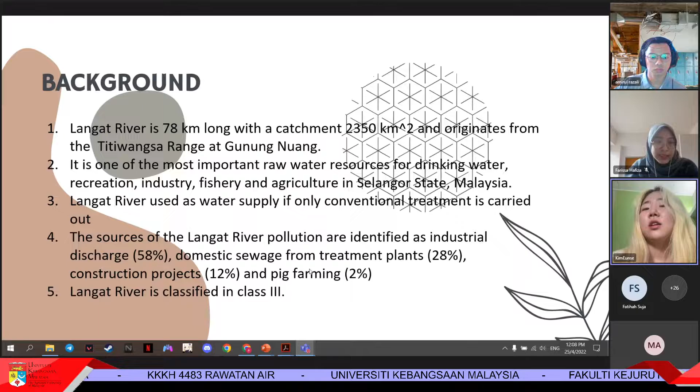It is one of the most important water resources for drinking water, recreation, industry, fishery, and agriculture in Selangor State, Malaysia. Langat River is used as water supply only if conventional treatment is carried out. The sources of Langat River pollution are identified as industrial discharge, domestic sewage from treatment plants, construction projects, and pig farming. Langat River is classified in Class 3.

And the water treatment plant, Kajang Utama, is located in Taman Kajang Utama, 43,000 Kajang, Selangor. The plant serves a wide range of customers, including residential premises, commercial, industrial, and government premises.

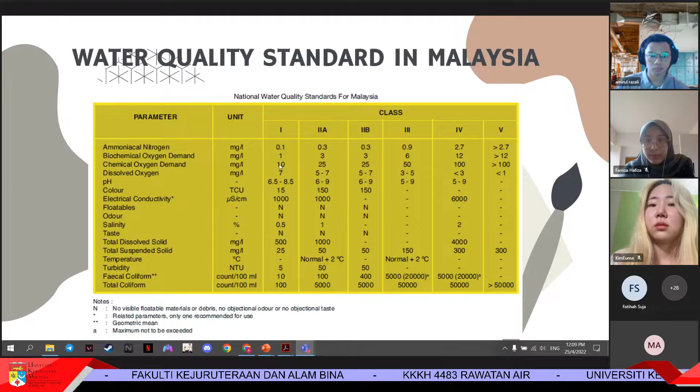As for class 1, it is for conservation of the natural environment. Class 2 needs conventional treatment. Class 3 is for water supply, requiring extensive treatment. As my friend presented before, the Langat River, which is the river we chose, is in category class 3.

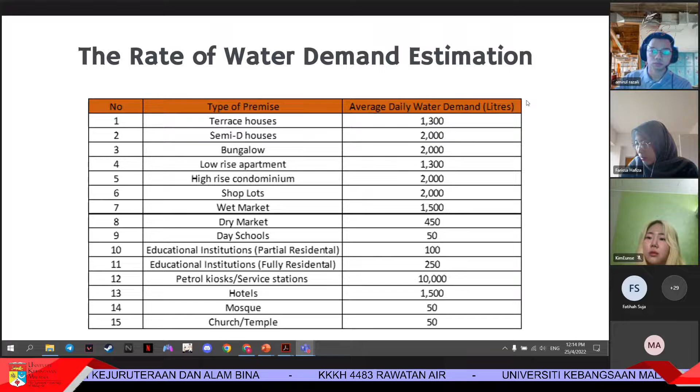The next step is to estimate the rate of water demand. The Uniform Technical Guideline of Water Reticulation and Plumbing is used to obtain the value of the average daily water demand. As listed in the table, there are 15 different types of premises with different values of average daily water demand. The water demand and consumption may vary considerably within each of these housing groups based on property characteristics. For example, a terrace house has a value of 1,300 liters of average daily water demand, while semi-D houses have a value of 2,000 liters.

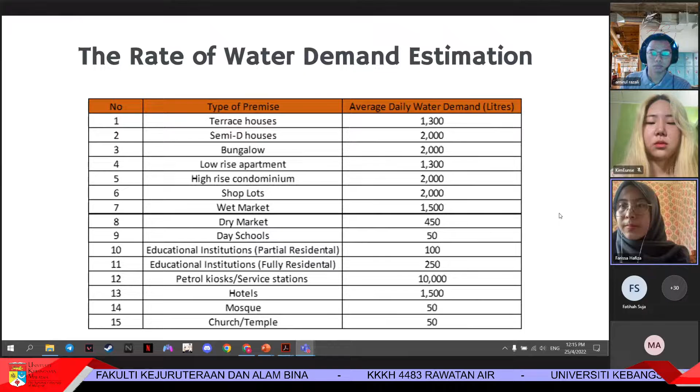The next slide is about the calculation of the water demand. For example, the terrace house density of 1,500 units is multiplied by the average daily water demand of 1,300 liters per unit, and then divided by 1,440 minutes and 1,000 liters, to obtain the estimated water demand in minutes. As a result, the estimated water demand for terrace house is 1.35 cubic meters per minute.

The water demand for other buildings is then calculated using the same steps as shown in the table. The total water demand in this area is calculated by adding the total water demand for all 15 buildings and premises. As a conclusion, the Kajang 2 catchment area estimated water demand is 8,521.75 cubic meters per day, which is equivalent to 5.92 cubic meters per minute.

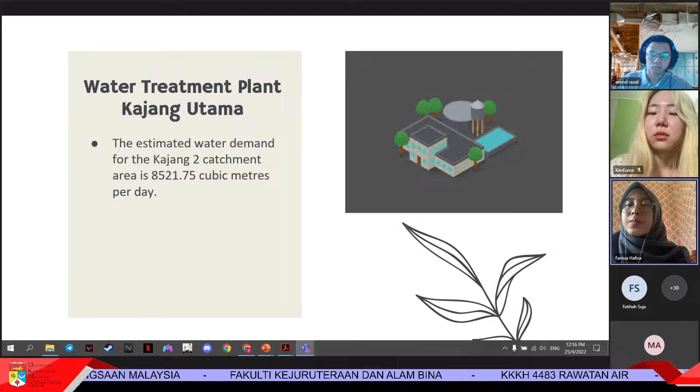Good, okay, we have listened to the presentation about Langat River. Okay, can I have a look at your comparison with the Korean guideline just now? This one. No, the one with... very good, this one, status character.

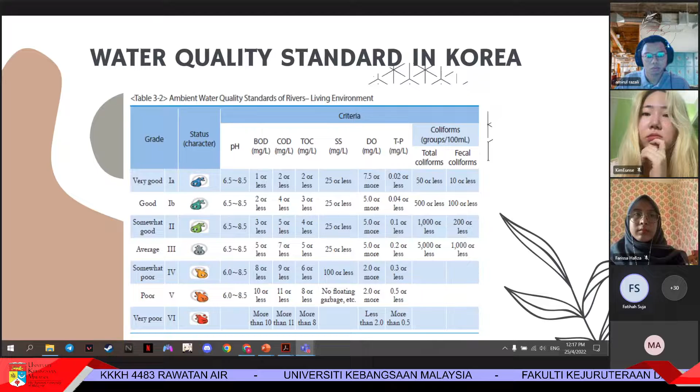Okay, in Korea, do you specify the water quality that is used, that will be used, for drinking water source? Do you specify which quality that need to be? So which quality do you allow the resource water to be used for your national drinking water treatment plant?

Actually, I have prepared that for the drinking water standard. Wait, I'll show you, this is the water quality standard for drinking water in Korea. But the data that we got from the journal is not much stated to compare with this table, so that's why I'm not presenting it. For example, like...

Okay, actually in Malaysia, I agree that you will use the class 3 water quality to be treated for your water treatment plant. But in the real case in Malaysia, we only allow it because our water treatment plants only have conventional unit operations. So if the water quality is not in class 2, they will automatically stop the treatment at the plant. Do you notice that? Sometimes in Malaysia they stop the treatment plant. It's not that we don't have the technology, but we maintain conventional technology to ensure we have a very low water price. That's why I want to know whether in Korea, do you specify any quality that needs to be adhered to before you choose the water source for your water treatment plant? Do you have the same as in Malaysia, or different? Yuns, do you know that?

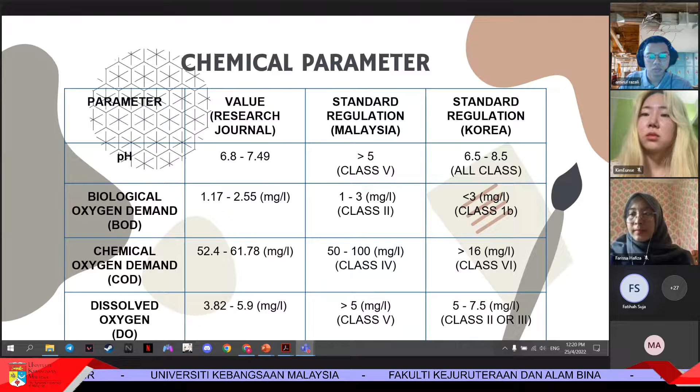Okay, so what are the parameters that were higher just now? You show me higher than that. Okay, so this pH is okay. BOD class 2 needs a conventional treatment - oh no, it's class 2. Okay yes. COD class 4, so I hope that in your next presentation and report you'll be able to tell why this COD becomes high - what are the sources of this COD to the river.

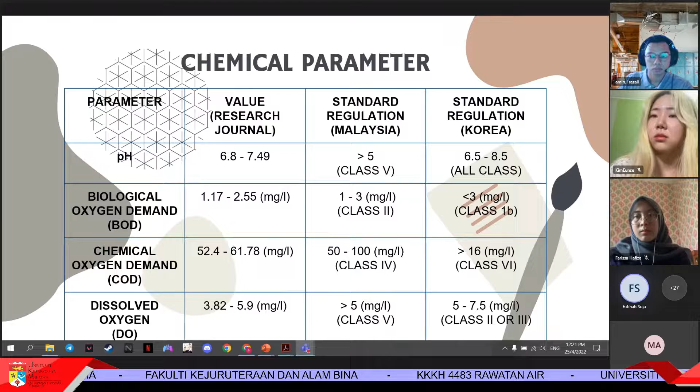You'll be able to tell by looking at what activities are along the river bank. And dissolved oxygen - yours, what is yours? 3.82 until 5.9. So it's quite low.

Okay, actually this one class 5 should be here, right? Class 4 should be here. The value in your research journal, it's not here, it should be here. Okay, yes, I understand why you said it's class 4 here. Yes, that's right, I just took the maximum. Okay, so this is class 5 - dissolved oxygen, very very polluted river.

Okay, next, your table on E. coli. Even though it's not in the standard regulation for water source, for drinking water you have the standard for E. coli. So meaning that whatever you treat, you must get it up to the drinking water standard after treatment. You have to make sure that the disinfection of your water treatment plant achieves the level set by the drinking water standard in Malaysia. Okay, good.

Thank you, Group 1, so you can start - design your treatment plan for the amount of water that you have calculated just now. Okay, thank you, Group 1.

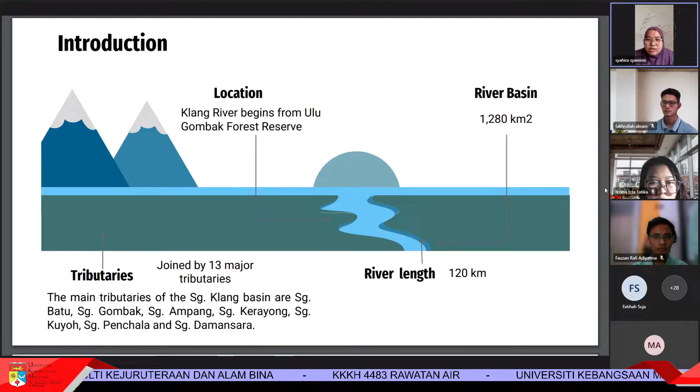Next, so it is actually located at central Selangor on the west coast of Peninsular Malaysia. As I mentioned just now, it is 120 km long, area covers about 1,288 km square, including most of the federal territory of Kuala Lumpur and parts of the state of Selangor. So it is actually the fourth largest river basin in Selangor out of 7.

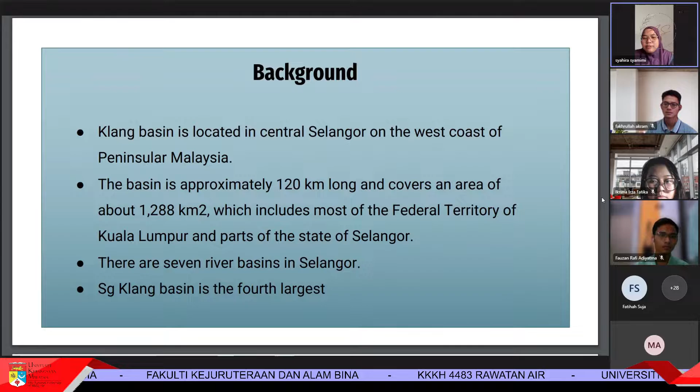Next, so annually the basin receives rainfall during the northeast monsoon, November to March, and southwest monsoon, May to September, and there are two intermonsoon periods, which are April and October. So with an average annual rainfall that ranges from 1,900 millimeter to 2,600 millimeter, the monthly mean temperature ranges from 26 to 28 degrees Celsius, with daily mean humidity about 80 to 85%.

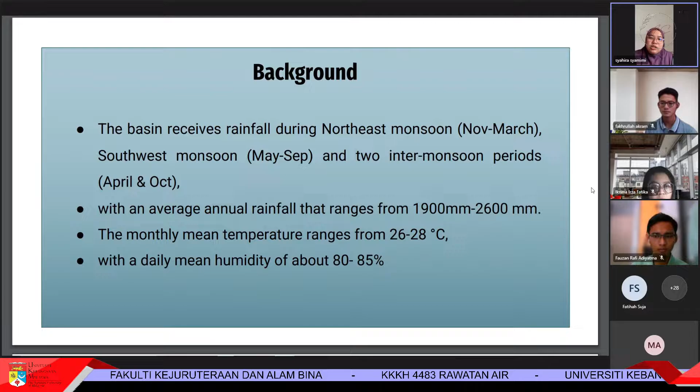For land use, we can conclude that the upper catchment consists of heavy and light industry, which is dominated there in Gombak district, followed by infrastructure 15% and small businesses 15%. So the land use changes as the river flows. The reserve is at the central section of the basin. For the central flow, land use changes predominantly to livestock 23%, agriculture 20%, industry 20%, followed by infrastructure facility 10%. Meanwhile, in the river mouth or the lower part of the river, it's focusing on residential area and business use. So that's all for background. I'll pass to my friends.

Alright, so next is the quality of the source of the water from the Klang River. Here you can see the data we get. For BOD it's 4.83 milligrams per liter. For COD, 50.61 milligram per liter. For total suspended solid, 50.9 milligram per liter. And for ammoniacal nitrogen, it's 1.97 milligram per liter. This is the index we use to qualify what class they are from the ammoniacal nitrogen, BOD, COD, and TSS. So after comparing this, we get the class. For BOD it's class 3, for COD class 2, for suspended solid class 3, and for ammoniac it's class 4.

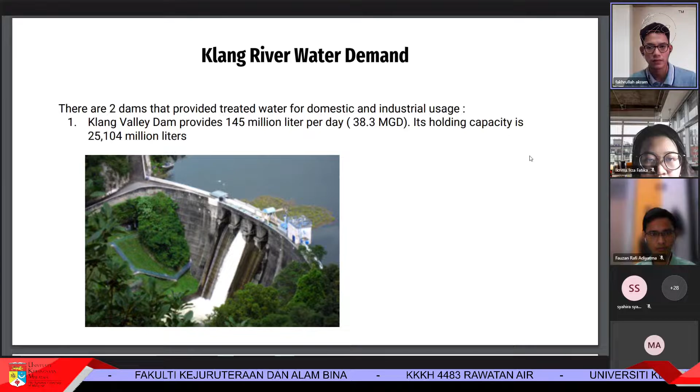Next, the second is Batu Dam. Batu Dam provides 114 million liters per day. Its holding capacity is 30.2 million liters.

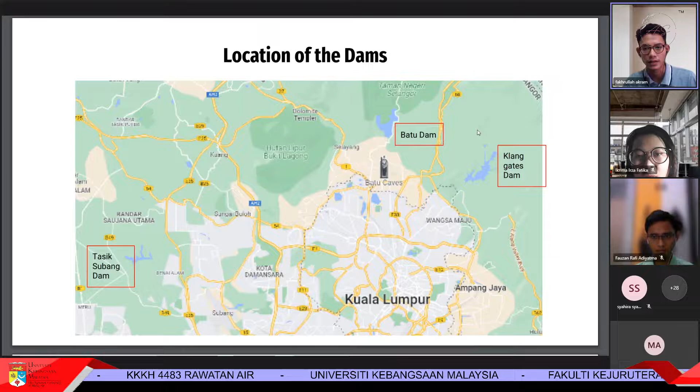Next, Tasik Subang Dam provides 21 million liters per day of treated water. Its holding capacity is 30.600 million liters. Next, these are the locations of the dams. Batu Dam in the center, the right one Klang Gates, and the left Tasik Subang.

Okay, this is the wastewater treatment plant within Klang River. There are 6 of them: Bukit Nanas, Sungai Batu, Wangsa Maju, Gombak, Ampang Intake, and Sungai Rumput. All of them are operated by Puncak Niaga Sendirian Berhad, and their design capacity is 355.37 million liters per day. So this is the demand that we will use in this project. Thank you. That's all from us. Thank you.

Okay, group 2. So you are going to build a water treatment plant in Klang River, but for the design capacity, you're talking about 355.37 million liters per day. Is it true? No, we pick Gombak, 31.37 million liters per day. In this project, we use 31.37 million liters, that one in Gombak. The 355 is all of the WTP design capacity combined. Okay, so 31.37 million liters per day.

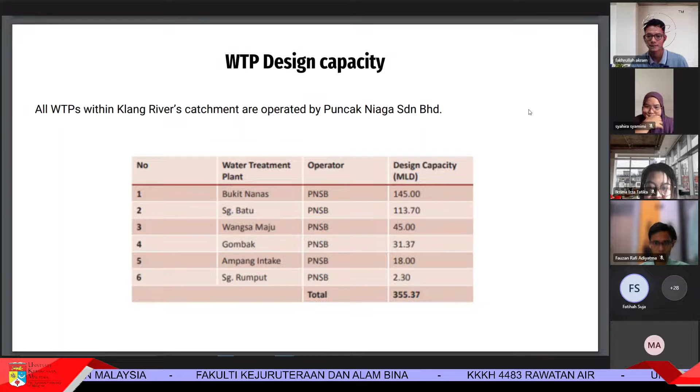Okay, so actually just now, is the ammonia higher than the guideline, the ammonia? Okay, see, comparatively, what is the standard guideline? So ammoniacal nitrogen, okay, you have to make sure that. Okay, now actually ammonia is in standard 4, right? Class 4, the ammonia in class 4.

Okay, so actually you don't have to follow whatever Puncak Niaga has already built in their treatment plant and unit operation, but I hope your treatment plant will be different from them. I want you to be creative in using whatever unit operations we'll be dealing with after this. Previously we learned about filtration and also coagulation, flocculation, and we will have more on unit operations about adsorption, membrane. So don't look at their treatment plant, just use the water quality criteria you found in Klang River for your own design treatment plant. Okay, Doctor, anything you want to ask? So far okay, bro. Okay, so just now I think, because Puncak Niaga, I don't think they treat the ammoniacal nitrogen?

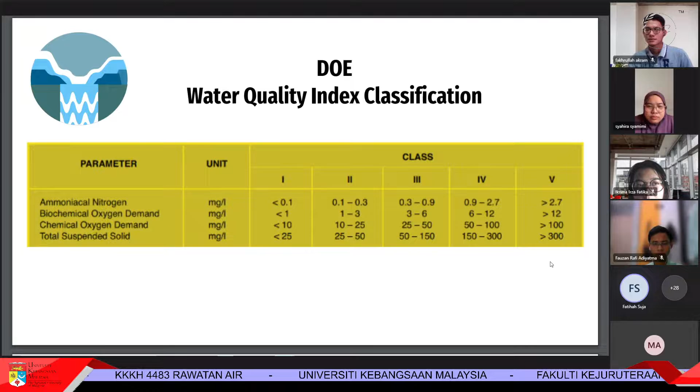Because usually whatever the water source for Malaysia is, when they have class 2 water. I think the one that you selected, maybe the unit for the water quality - where did you get the water quality from? The water quality criteria, where did you get this one here?

For the quality, we use the search from the State of the River Report 2011.

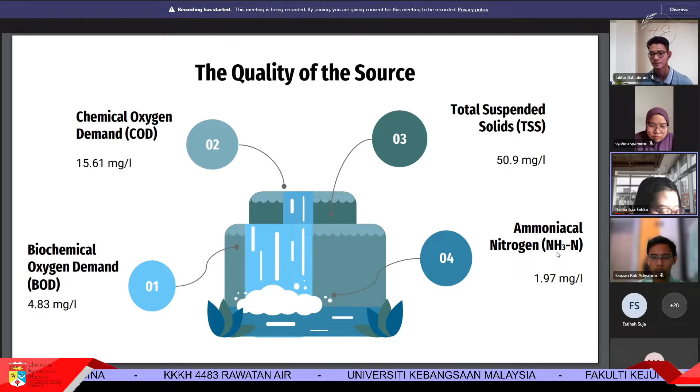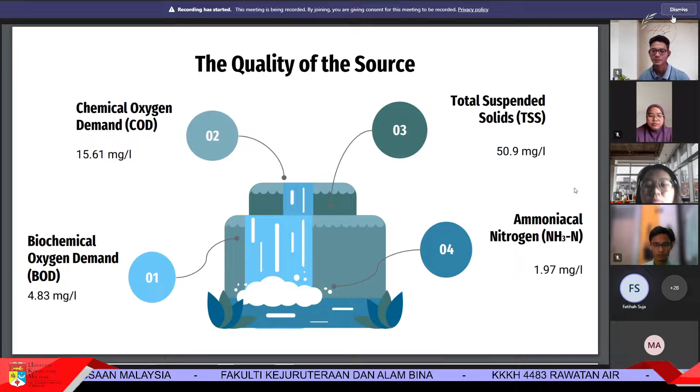Okay, so you have to put the references that you have used, in your report and also in the presentation, you should state the reference from where you get the data. Okay, these are the quality parameters that exceed the required standard, right?

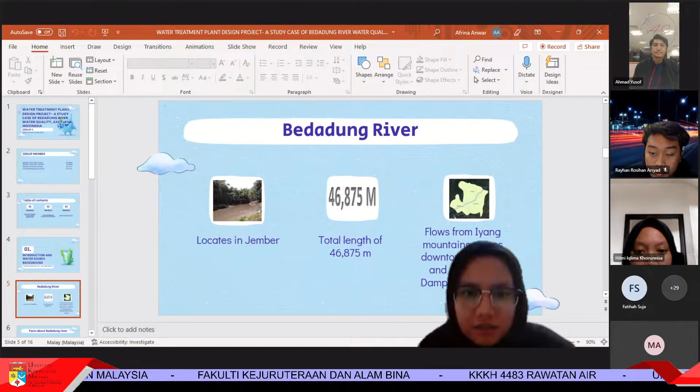Next, maybe it can be continued by my friend Iqlima. Okay, next slide please. Okay, Iqlima.

Okay, the next slide is about facts regarding Bedadung River. The first fact is that Bedadung River has an important role in the water demand of the surrounding community. This water demand includes household purposes like washing, bathing, or toilet activities, as well as agricultural purposes. The second fact is about Bedadung River's water characteristics.

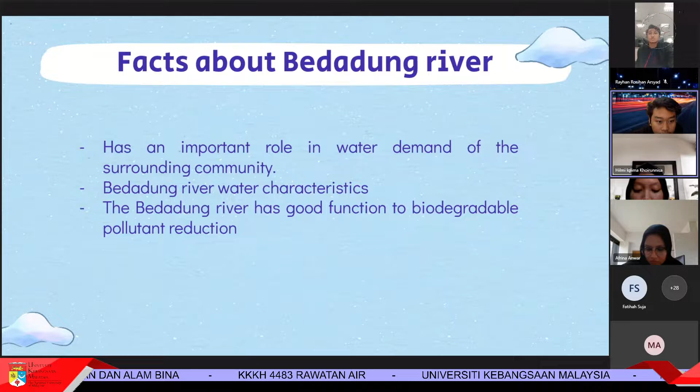Because of the activities around the Bedadung River, water quality is deteriorating due to outflow from household waste and agricultural land. Local residents' activities such as bathing and washing contribute to the turbidity of river water through the use of soap and detergent. At some points around the Bedadung Basin, it smells unpleasant. The last fact is that Bedadung River has a good function for biodegradable pollutant reduction, indicated by a reoxygenation rate bigger than the oxygenation rate of the river.

It is used by the community and stakeholders as a source of both raw water and irrigation water. Therefore, it is used for washing, bathing, and latrines. Next slide, we'll continue with my friend.

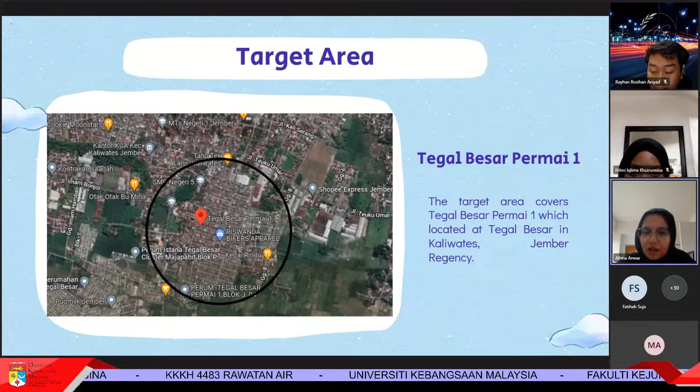So the target area where we collected the water demand data is at Tegal Besar Permai 1, located in Tegal Besar, Kaliwates, Jember Regency. There are 16 types of areas, which include houses, market, shop, recreational, office, education institution, hospital, hotel, and place of worship.

Then the average daily water demand was obtained from guidelines and nature standards, and the density was assumed. For the Q value, the second-to-last row, we calculated it by multiplying the average daily water demand by the density, then by 1/1000. Then we calculated Q at the last row, times 1/1440, and from that we got the total flow rate for every area.

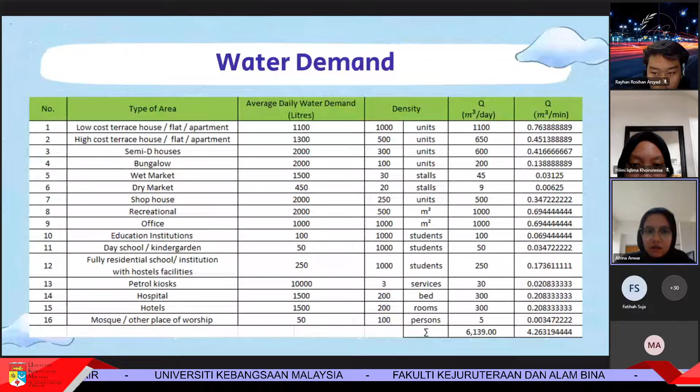So we were talking about water source quality, and from the research, the study was carried out in the Bedadung River, specifically in the urban segment of Jember, with 5 sampling points: Selamat Riyadi Street, Mastrip Street, Bengawan Solo Street, Sumatra Street, and Imam Bonjol Street.

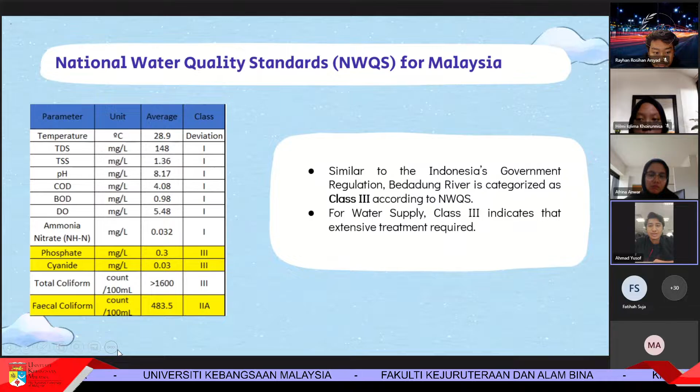Okay, thank you, group. This one, Prof, is just what needs to be improved based on the data that we get. Right, that's all from us.

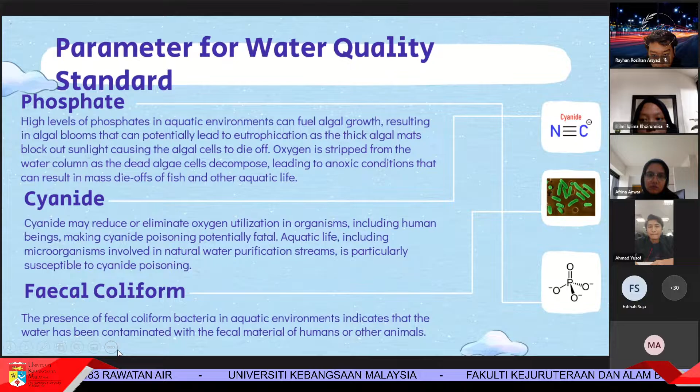Okay, thank you, Group 3. Very interesting that you look at this river because actually the river is from the mountain, right? It's not a very clean river, but that's why sometimes if you want to use it for classifying the river source or water source, you first just need to look whether it's suitable or not. But once you look at all the parameters of drinking water, you can find that they need treatment, even though in the Malaysia case it's in class 1 without treatment.

But now you look that they have this phosphate, cyanide, and coliform. Yes, coliform. And it's interesting that when I look at coliform, it's high, but the amount of ammoniacal nitrogen is low. Usually, if you have high coliform, meaning that your ammoniacal nitrogen also is high, because usually they come together due to urea, because all the faeces from warm-blooded animals have this ammonia, and at the same time they will cause this coliform.

So I want you to look carefully at this river and try to find whatever the land use is, and how they come out with this quality of river. In your design of the treatment plant, you should also look at the land use of the river bank, and figure out why this coliform is high but ammoniacal nitrogen is low.

Muhammad Amir, hello, Assalamualaikum. Can you hear? Yes, I can hear. Screen Muhammad Amir - Muhammad Amir, which one? I'm Muhammad Amir. Oh, you're Muhammad Amir, okay. Nur Syahimah, okay - Nur Syahimah, Rafi, and Alifia. Okay, you can start your presentation. Start, okay.

Assalamualaikum to Dr. Fatihah and my fellow friends. Today we would like to present the case study of JRB, which means Johor River Basin, design of the water treatment plant. Our group consists of 4 people: me, Amir Asyraf, and Alifia, Syahimah, and last but not least Rafi. The content consists of introduction, location of the source, community to be served, water quality and characteristic, and current condition at the site.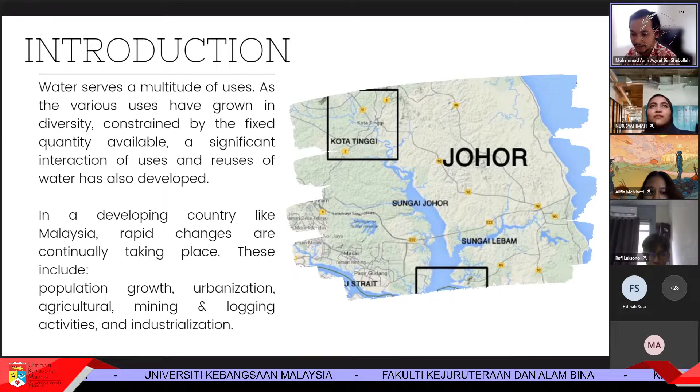As we all know, water serves a multitude of uses, and as the various uses have grown in diversity, constrained by the fixed quantity available, significant interaction of use and reuse of water has also developed. In a developing country like Malaysia, rapid changes are continually taking place, including population growth, urbanization, agriculture, mining and logging activity, and industrialization.

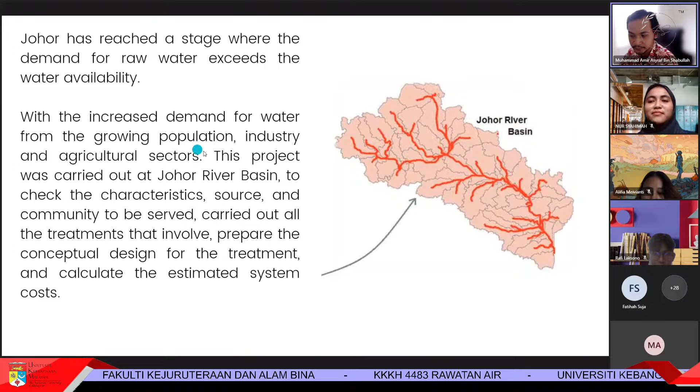Johor has reached a stage where the demand for raw water exceeds the water availability, with increased demand for water from the growing population, industry and agriculture sector. This project was carried out at Johor River Basin to check the characteristics, source and the community to be served, and to carry out all the treatment involved - prepare the conceptual design for the treatment and calculate the estimated system cost.

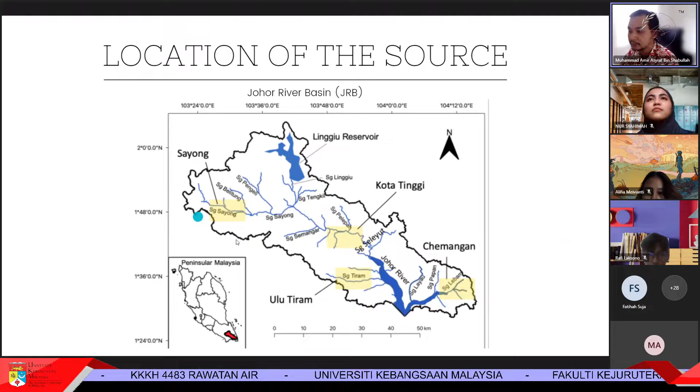Here is the location of Johor River Basin at Johor Bahru. I will pass to my next slide.

The Johor River is the main river in the Malaysian state of Johor. The river is 122.7 km long with a catchment area of 2,636 km square. The Johor River Basin covers approximately 14% of Peninsular Malaysia state Johor. The river and its tributaries are key water supply sources not just for the state but also for neighbouring Singapore. The Johor River in Kota Tinggi is used by Syarikat Air Johor and the Public Utilities Board of Singapore for about 250,000 cubic meter per day. Both projects have been in existence since the mid-1960s. Furthermore, the Linggiu Dam, which was built and occupied in 1963, complements the water supply to both Johor and Singapore.

JRB is an essential supply of water in Johor for drinking, industrial and agricultural processes, accounting for up to 55%, which is 927 million litre per day of total water demand in the state. According to the 1962 water agreement between Malaysia and Singapore, Singapore has the right to draw water up to 1,100 million litre per day, roughly half of Singapore's daily drinking water requirement. Water quality in JRB River is highly impacted by land development within the basin. There have been several instances of excessive ammonium concentration in particular. Such incidents have even resulted in the shutting down of 5 water treatment plants in 2019, disrupting water supply to tens of thousands of residents in Johor.

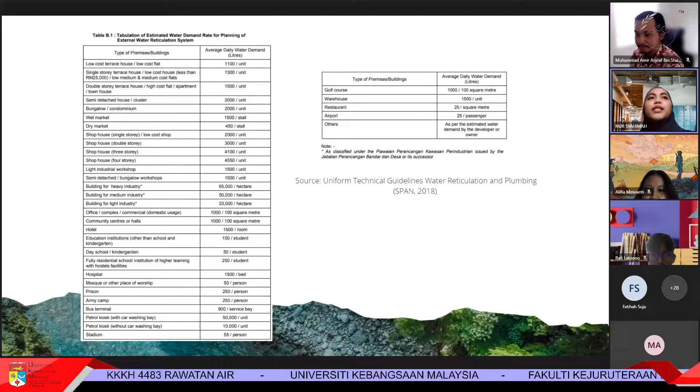Let me continue. This is the water quality and characteristics that we found on Johor River. For the physical parameters it's turbidity and temperature. The number of observations for turbidity and temperature is 445 and 426. For the chemical, the pH number of observation is 450 and the COD is 425, and for the biological it's E. coli and coliform.

It is the same, 387 number of observations. So the average result for turbidity is 64.3 NTU. The temperature is 27.9 degrees Celsius. For the pH it is 6.29, and for the COD it is 13.7 ppm. For E. coli it is 1.00 MPN per 100 ml, and for coliform it is 41.00.

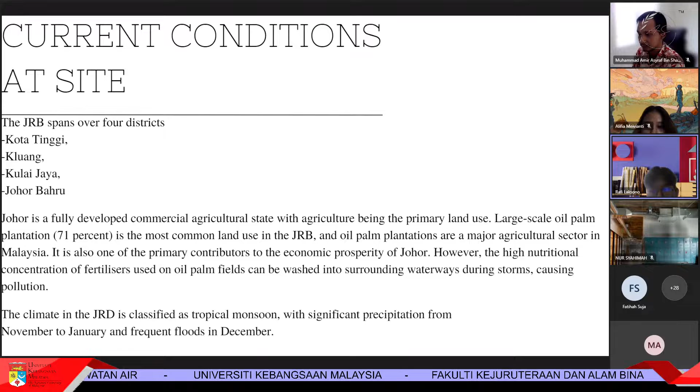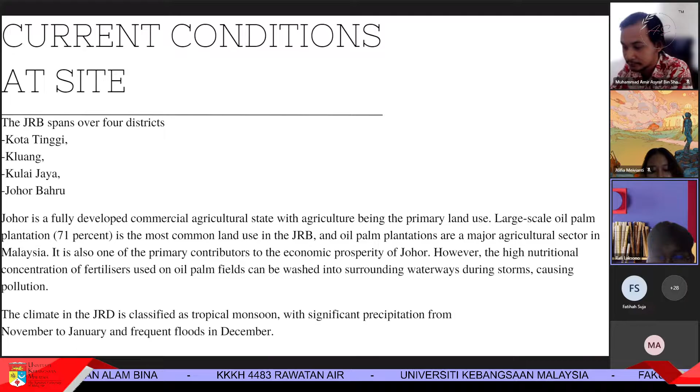Johor is a fully developed commercial agriculture state. The most common land use in JRB is large-scale oil palm plantations at 71%, and oil palm plantations are the main agricultural sector in Malaysia. However, high nutrient concentration from fertilizers used in oil palm fields can be carried into surrounding waterways during storms, causing pollution. For the climate, the JRB is classified as tropical monsoon with significant precipitation from November to January

and frequent floods in December. Okay, thank you, this is from our group. Thank you.

Just now, you are doing Johor River, right? Okay, can you once again highlight what are the parameters that exceed the guideline standard that you want to especially pay attention to in your design of your water treatment plant?

Which one? 64.3, I don't remember, so can you put it side by side? Which parameters are higher than what you want? And what water quality actually is this river according to these water characteristics?

Okay, so Doctor, in the journal it says that the water quality is for Class 2 in the journal. Class 2 meaning only conventional treatment is needed.

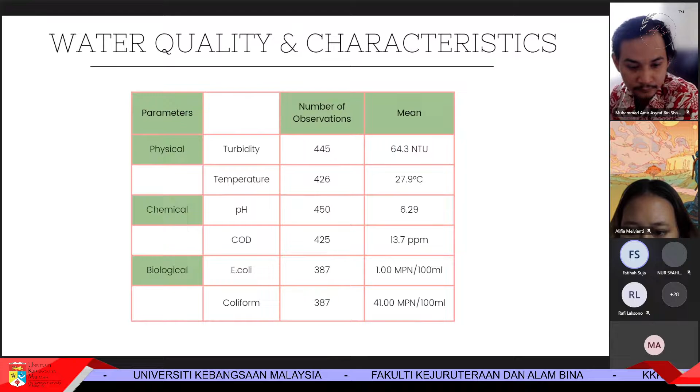So if you can find other parameters that make the river into Class 3, then your design of the treatment plant will be more exciting, because you will have to show us that you are able to treat other parameters not using conventional treatment.

Maybe this is only part of the water, the river, right? Maybe you can find a bit along the river, a more polluted section, so that you can use that river water quality to design your treatment plant. Can you do that? It's a big river, right, Johor River.

Because just now you explained to me that the land use is mainly for palm oil plantation, and also you have this fertilizer issue. Since oil palm plantations are a major agricultural sector, there will be a lot of runoff, non-point sources from all these oil palm plantations and agriculture sector. But when you show me the table of water quality, it looks nice, it's in Class 2, so you only need conventional treatment.

So this land use doesn't really show us the real quality of what you'd expect. Maybe you need to find a section of Johor River that is a bit polluted so that you can use that water source for your treatment plant. Is it possible?

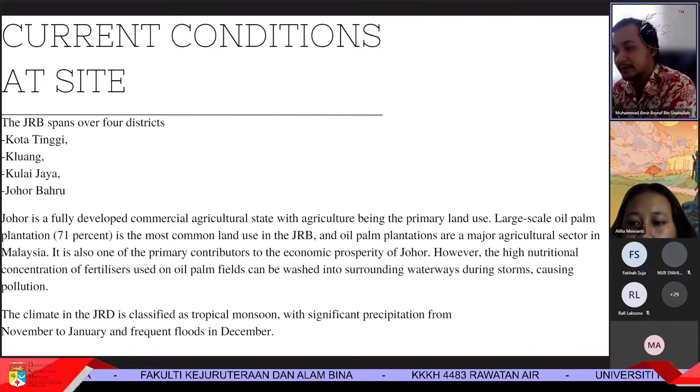We will try, Doctor. Okay, okay, thank you Group 4.

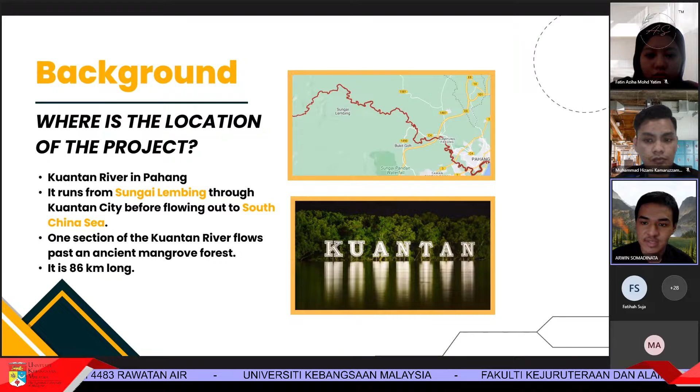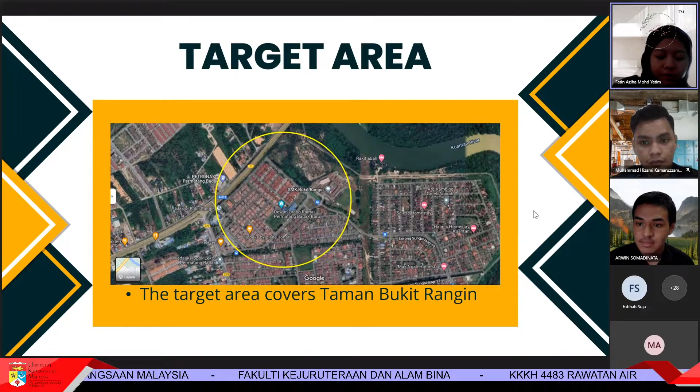This is the target area that covers Taman Bukit Rangin for water supply. Taman Bukit Rangin consists of 50 units of double-story houses, 164 units of single-story houses, 10 units of shop houses, 1 unit of budget hotel, and 1 unit of secondary school.

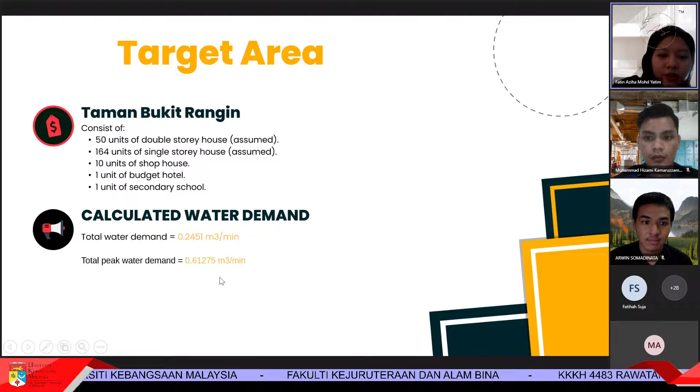The estimation of water demand helps to determine the quantity of water that will be used to generate various demand patterns. Most of the water demand arises from residential, institutional, and public uses. As per calculated, following SPAN guidelines, the total daily water demand is 0.25 meter cube per minute and the total peak water demand is 0.61275 meter cube per minute.

Next is the specific source of water supply for Kuantan River. Kuantan River is one of the important river basins in Pahang, covering 1,630 kilometers square of catchment area, starting from the forest reserve area in Ulu Kuantan district towards the South China Sea. Kuantan River is the largest river in the capital area of Pahang, Kuantan, and the major source of water supply for domestic, industrial, and agriculture usage, providing 350,000 meter cube per day. Examples of tributary rivers located around Kuantan River are Pengorak River, Karang River, and Balok River.

Next is the problem in tributary rivers along Kuantan River. First is regarding annual flooding. Kuantan River has a history of experiencing floods since past decades because of its tropical climatic condition. Torrential rain brings spilling over of river surface runoff, inundating low-lying areas and hampering human social and economic life. Secondly, it is located near industrial facilities. The river flow passes through wide industrial facilities, which include steel industries, palm oil mills, pipe coating, and other development activities.

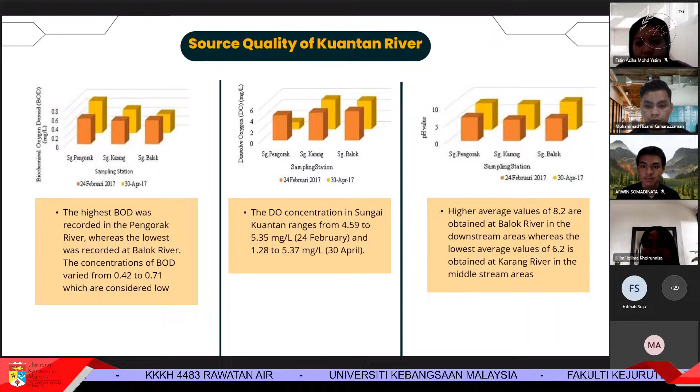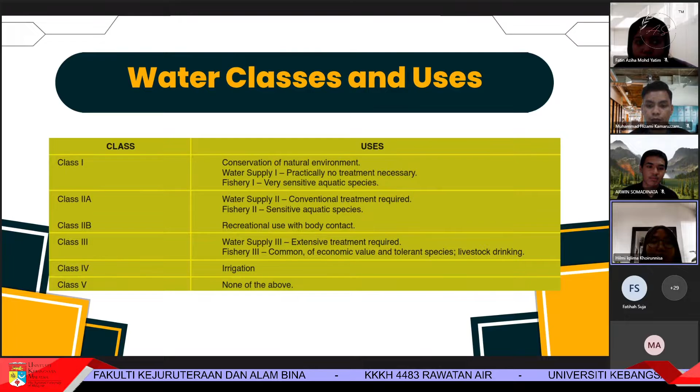This shows the water classes and uses for each class. Class 1 consists of conservation of natural environment, water supply with no treatment needed, and fishery. Class 2 has water supply requiring conventional treatment, fishery class 2, and recreational use with body contact. Class 3 has water supply requiring extensive treatment, and fishery class 3 for common economic value species and livestock drinking. Class 4 is for irrigation, and class 5 is none of the above.

Okay, maybe that's all from us. Thank you, Group 5.

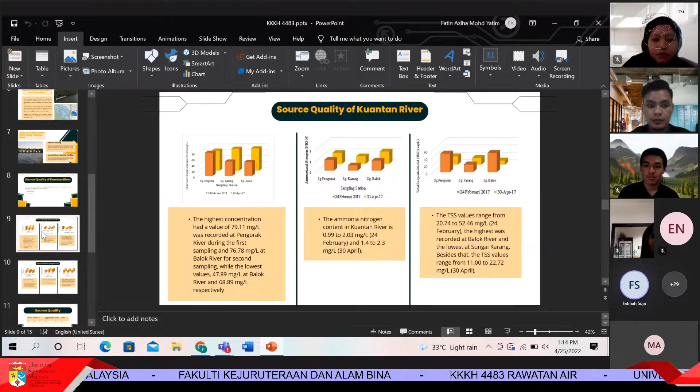This is also good that you might be able to design a good treatment plan. Show me once again the quality of the river water, not this one, next slide.

You can see the source and quality here, the COD to BOD ratio. You have to look at whether your COD, the organics, the carbon source, is biodegradable or could be from a sewage treatment plant or from industries. Look at the BOD and COD ratio. What we found here, BOD is very low but COD is 63.8, quite high. So you should be able to tell that the organic carbon is actually from industries, not biodegradable sources. This means when you design your water treatment plant, you have to be careful with the selection of your unit operation.

Also, look at the ammoniacal nitrogen, which is quite high. Maybe it's not from a sewage treatment plant because your BOD is low. Your COD is high, but your ammoniacal nitrogen is also high, so it could be from industries. This is interesting because you must be able to choose the right unit operation to reduce all of these parameters down to drinking water standard.

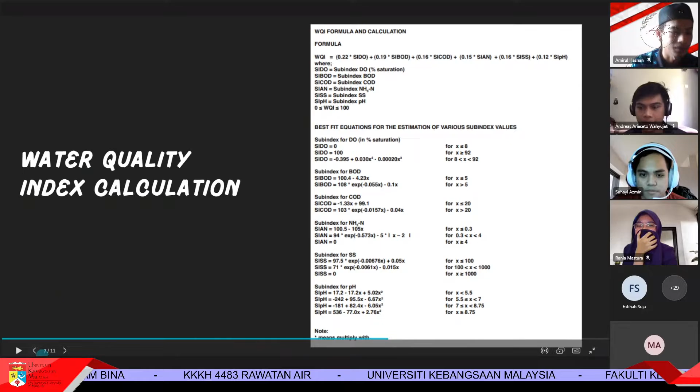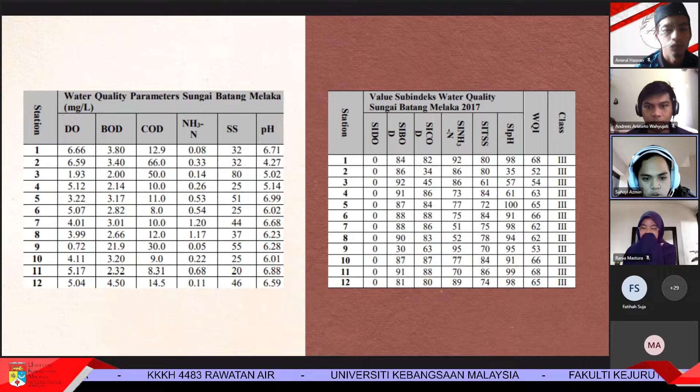Okay, so after we use the WQI formula to calculate all the parameters, we conclude that all of the stations in Sungai Melaka are in class 3, which is slightly polluted. Next.

Yeah, so according to the water quality index value, Sungai Batang Melaka is classified in class 3, which is slightly polluted, meaning the quality of water is classified as medium water. Medium water can be used as a water supply, extensive treatment required, and fishery common of economic value and tolerant species, livestock drinking.

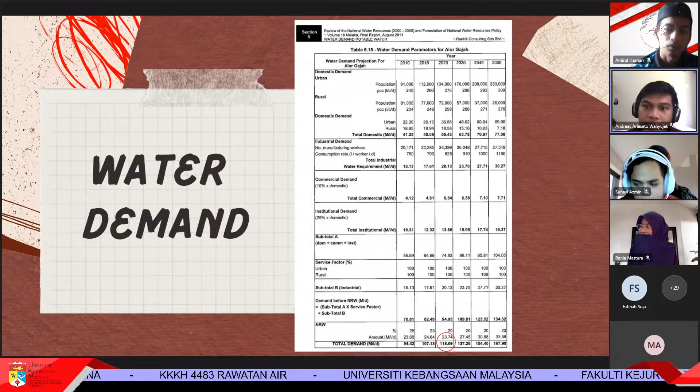So this is the water demand from the nearest area to Sungai Melaka, from Alor Gajah. We have domestic demand from the urban area, we have the population shown there, and the PCC is 245 liter capita per day, 260, 275, 286, 293, and 300.

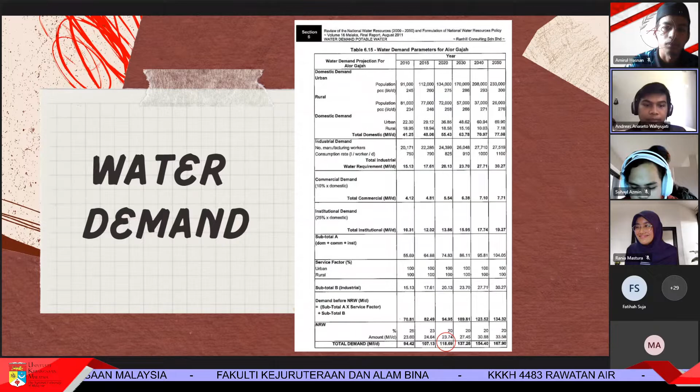Okay, thank you, Group 6. Currently, is there any water treatment plant near the river? Is there any water treatment plant? When you studied the area, did you find any water treatment plant? Ada tak? I think yes, wait, oh, there's a water treatment plant. There are some water treatment plants near Melaka River, ma'am. So they use the water treated from that treatment plant for drinking water supply. Is it? Or as a wastewater treatment plant or water treatment plant?

Water treatment plant, water, yeah, they use it for drinking water. It's stated it has a production capacity of 55 million liters per day. Oh, but they use the water from the Sungai Batang Melaka. But it's in class 3 here, so maybe not from that section.

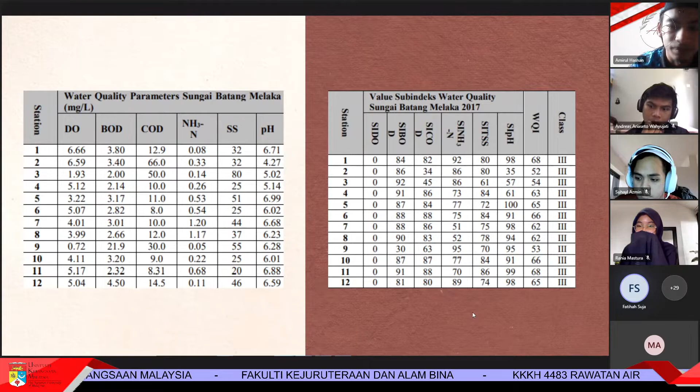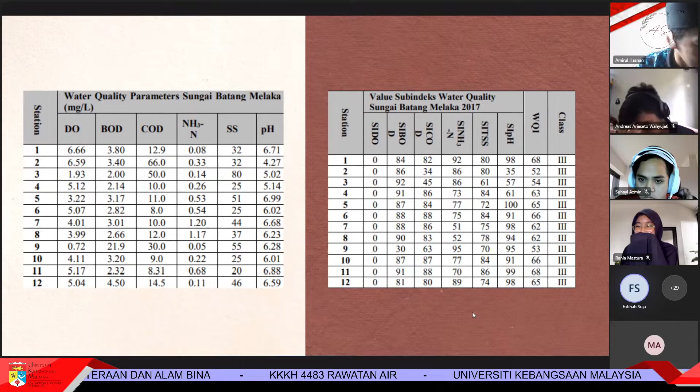Any question you want to ask me? And then maybe check again whether this water treatment plant takes water from the Sungai Batang Melaka or from another source, because this is in class 3. Okay, and it needs extensive treatment, and in Malaysia, usually we don't do extensive treatment for our water treatment plants.

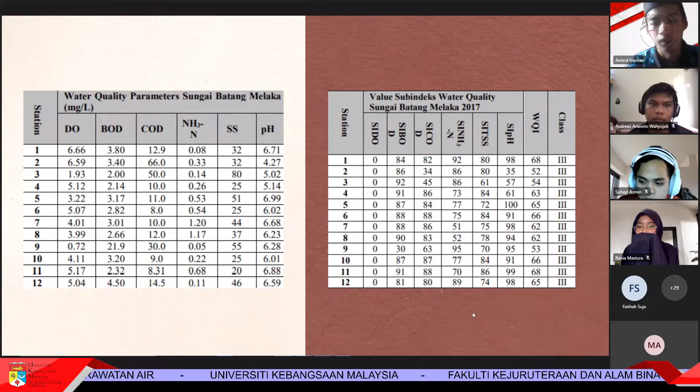Do you all need to stop at 2? Do you all have any class after this? After 2? No, Prof. We have another 4 groups. Do you want us to continue, or stop at 2 and maybe 2 groups will present tomorrow? We have 7, 8, 9, 10, another 4 groups. So we need about 1 hour, but our class has to stop at 2. But if you want to continue, I'll continue so that you don't have to have your class tomorrow morning. Okay, you think about that first. Okay, group 7, you can start.

Okay, Muhammad Hafiz, Muhammad Dirham, Zahwa Safina. Assalamualaikum and greetings to everyone. We are from Group 7, about to present our first presentation of the water treatment plant design project, where we chose Perak River as our study area. Here are the group members of our group.

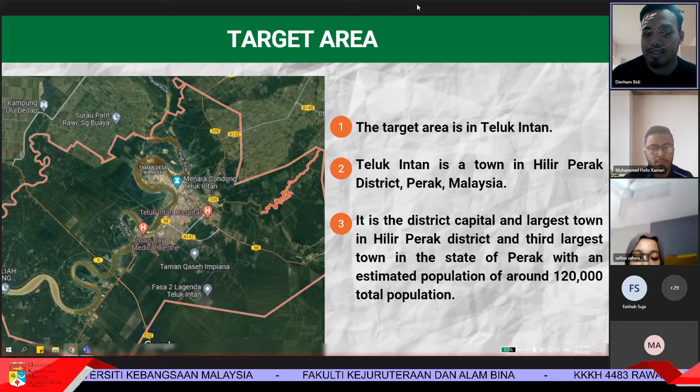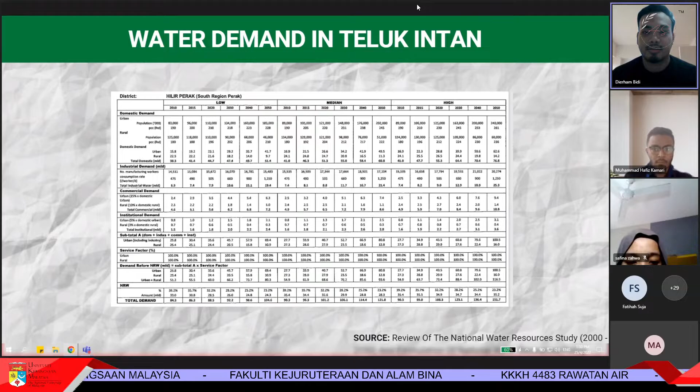Lastly, for the high projection, the total water demand increased from 90.3 million liters per day in 2010 to 151.7 million liters per day in 2050 in prediction. The figure shows the projected water demand for Hilir Perak.

Okay, I will continue.

Perak River is the second longest river in Peninsular Malaysia after Pahang River. The river extends from the mountainous Perak, Kelantan, Thailand border of the Belum Forest Reserve, and ends at the Straits of Malacca. As the second longest river in Peninsular Malaysia, Perak River is an important asset to the state and people of Perak. It serves as the primary source of raw water and contributes approximately 70% of raw water in Perak that is channeled to the population.

This amounts to about 1,300 million liters of water distributed to 2.5 million residents in Perak daily. This number is expected to increase in the future as the population of Perak increases. Apart from this, the river also serves as one of the main sources of livelihood for fishermen and is also a tourist attraction, providing tourist activities. The river also contributes in many other contexts in terms of benefit, profit, and serviceability.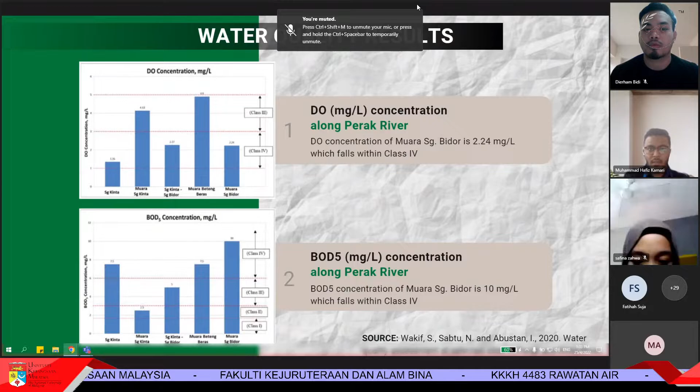The first parameter used is dissolved oxygen concentration, and the result for Station 4, Muara Sungai Bidor, is 2.24 milligrams per liter, which falls within class 4. The second parameter is biochemical oxygen demand concentration, and the result for Station 4 is 10 milligrams per liter, which also falls within class 4.

The third parameter used is chemical oxygen demand concentration, and the result for Station 4, Muara Sungai Bidor, is 7 milligrams per liter, which falls within class 1. The fourth parameter is ammoniacal nitrogen concentration, and the result for Station 4 is 4.53 milligrams per liter, which falls within class 5.

The last parameter used is total suspended solids concentration, and the result for Station 4, Muara Sungai Bidor, is 21 milligrams per liter, which falls within class 1. Here is the simplified table showing the water quality index of each station. As mentioned earlier, we focus on Station 4 since it is near our target area, Teluk Intan. The quality of water for Station 4 can be concluded as class 3. However, on the basis of the water quality index itself, samples obtained from Station 4 fall into the polluted category. Thank you.

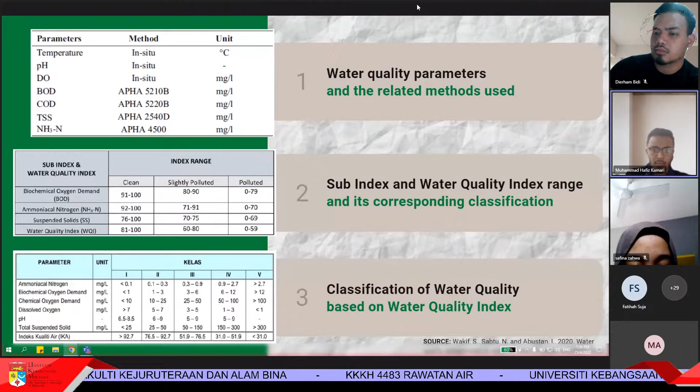For the journal, it doesn't state the metals concentration. Because when I look at the water quality criteria, your BOD is high, your ammoniacal nitrogen is high. It could be from organic pollutants, could be from sewage treatment plants, because your COD is lower than your BOD. This is a very rare occasion where COD is lower than BOD. There's only one reason why BOD is higher than COD. So when you say that it's from metals and you don't show any pollutant from metals, metals could be from industry, then you need to find out whether what you found from that journal is correct or not.

Actually, you only used one source, is it? What is the title of this journal? Water quality assessment at selected sites in Perak and Kinta River, published in 2020. Oh, so they talk about these heavy metals somewhere along the river or at the site that you just showed us? Actually, in the journal there was no metal concentration assessment.

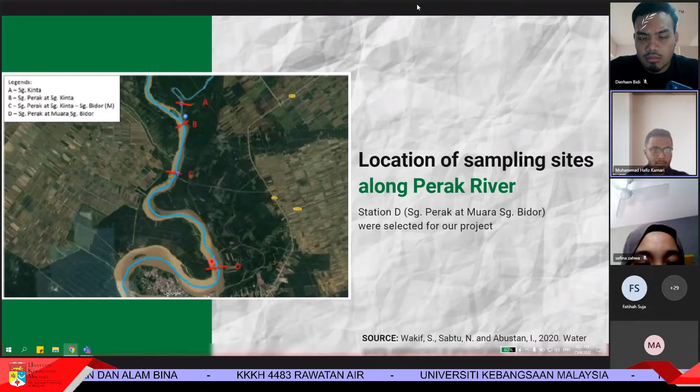But where did you get this info about the presence of metal? It is from my another group member. This one is from Wikipedia, Prof.

Oh, okay, then you cannot combine. You need to be based on the water quality. Maybe Wikipedia could be from Perak River, how long is it, 400 kilometers? So maybe there's a section with the presence of metal. Maybe they have a water treatment plant where they put aluminium sludge used as coagulant, and they dump it somewhere, and then you got this presence of metals. But at this section that you are treating, the one that you gave me, the water quality criteria, there's no indication that it's from metals. So you have to be consistent in providing the background and also the water quality criteria that need to be reported. Okay, thank you, Group 7.

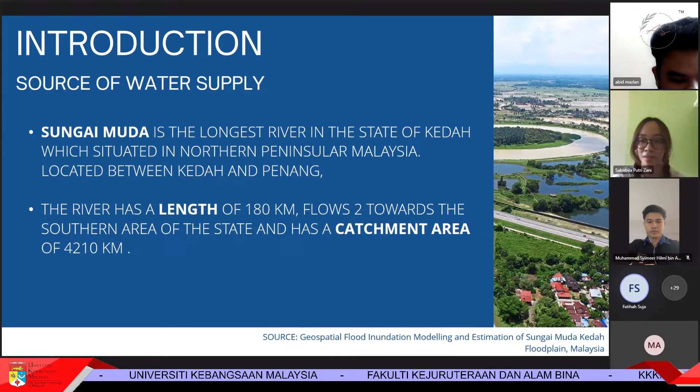Sungai Muda is the longest river in the state of Kedah, which is situated in northern peninsular Malaysia. It is located between Kedah and Penang. The river has a length of 180 kilometers, flows towards the southern area of the state, and has a catchment area of 4,210 kilometers square. Downstream, the river changes its course towards the west coast after passing the confluence of the mainstream and its largest tributary, which is the Ketil River. There are 3 major tributaries of the Sungai Muda river system: the Ketil River, the Sedim River, and the Chepir River.

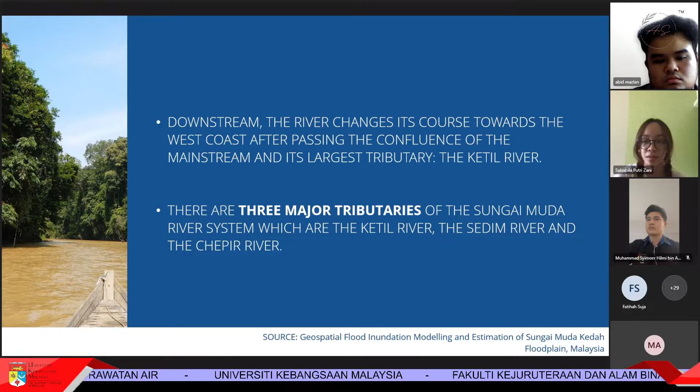So moving on to water demand, we need to evaluate the water demand for a certain community. First, we have to know what water demand is. Water demand has become an important component in planning and managing effective water resources. This indicates how vital it is to make water accessible for residents' needs, industries, and other commercial organizations. Since water demand is increasing day by day, the source of water becomes limited.

So who is our target consumer? Based on Perbadanan Bekalan Air Pulau Pinang, in year 2020, the population of the state of Penang was projected to be 1.776 million people, and about 46.6% of population, around 825,000 people, resided on Penang Island. In a land area of 293 square kilometers, Penang Island has insufficient raw water resources to meet water demand. Treated water was pumped from SWTP in Seberang Perai to ensure water supply sufficiency.

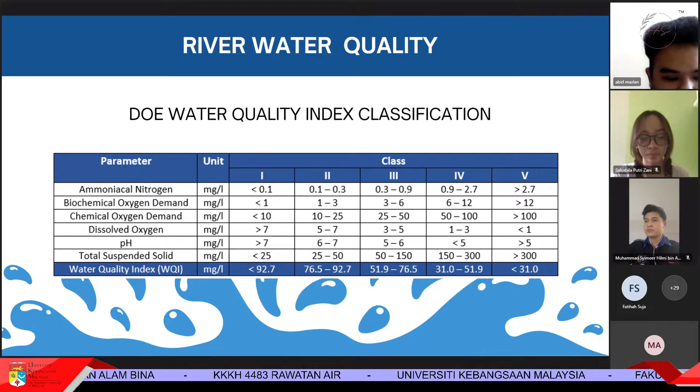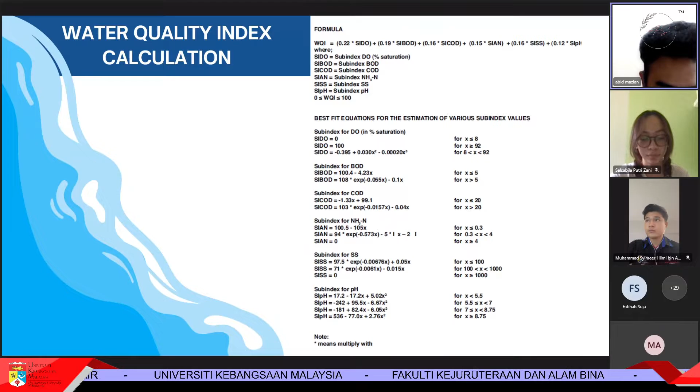So the crucial part is we need to know our WQI, which is the water quality index. We calculate it using this formula, where we multiply all the sub-index parameters with the coefficient for each parameter, and we will get the WQI.

This is a sample from our sampling station. DO is 3, BOD is 5, COD is 46, ammoniacal nitrogen is 0.2, TSS is 42, and pH is 7. We substitute this data into the formula and get a result of 64.

We compare the result with the water quality classification based on the water quality index. At the last row of this table, there is a range of 60 to 80, which classifies the water as slightly polluted. So 64, being in the range up to 80, is classified as a slightly polluted source.

So based on the WQI calculation, we get all 5 sampling stations in class 3, which is classified and identified as a slightly polluted river. So it requires an extensive water treatment plant before we can supply the water for domestic usage.

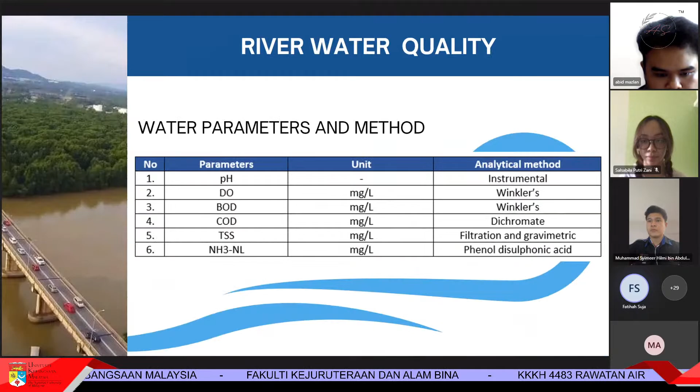So you have Sungai Dua, Seberang Perai, Penang. You will treat the whole section of the river, right? Just now you had 5 sampling stations, right? Yes. So actually this river is in Kedah, between Kedah and Penang, and it's also a famous river.

So at present, they have already built a treatment plant, is it? Yeah, it's called the Sungai Dua Water Treatment Plant. So are you using the same source for your water treatment plant design, or a different section of the river? We use a different section of the river to design the water treatment plant. Okay, because I see that some sections are in class 3, so you cannot take that as a water source for Malaysia.

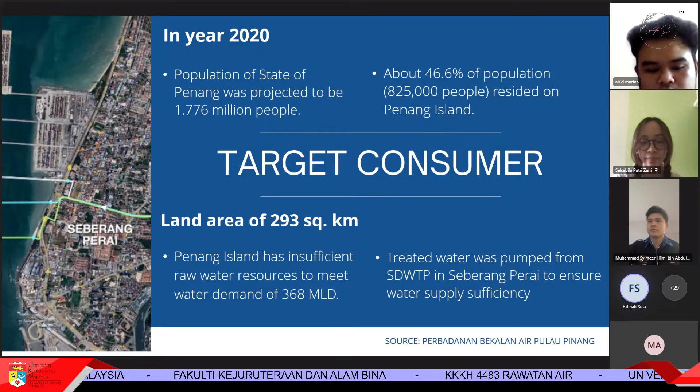Okay, what else? You've provided all this, so you have pH, DO — it's polluted with organic pollution. Actually, the COD is comparatively higher than it should be relative to BOD — COD is about 46 divided by 5 times higher, so it's much higher, meaning there must be pollutants from industries. And the ammoniacal nitrogen is not that high, maybe because of these industrial pollutants entering the river. So you have to be very selective in your unit operations for your water treatment plant design.